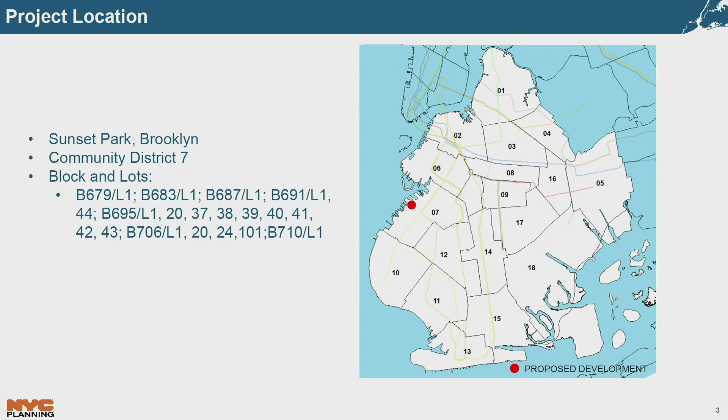These actions would facilitate the renovation and reactivation of a complex of 16 historic buildings and the construction of 3 new buildings that would contain a total of up to 6.6 million square feet of industrial, commercial, and community facility uses. The project is located in the Sunset Park neighborhood of Brooklyn in Community District 7.

Bush Terminal operated as a multimodal facility comprised primarily of warehouse and distribution uses in a complex of buildings and piers beginning in the 1890s. Goods that arrived by barge were received by rail and then distributed to the rest of the city. In 1928, Bush Terminal employed 35,000 people and had its own court system, police force, and fire department.

In the mid-1950s, Bush Terminal employed 25,000 workers and over 100 companies. However, employment began to decline following World War II as heavy manufacturing and large-scale warehouse distribution declined in New York City overall. In 2012, Bush Terminal employed fewer than 2,500 people.

Industry City is the privately owned portion of the former Bush Terminal complex that is the subject of the proposed actions today. Much of the remainder of the Bush Terminal complex was acquired by the City of New York in the 1970s and is comprised of a number of buildings and piers that are partially or fully vacant.

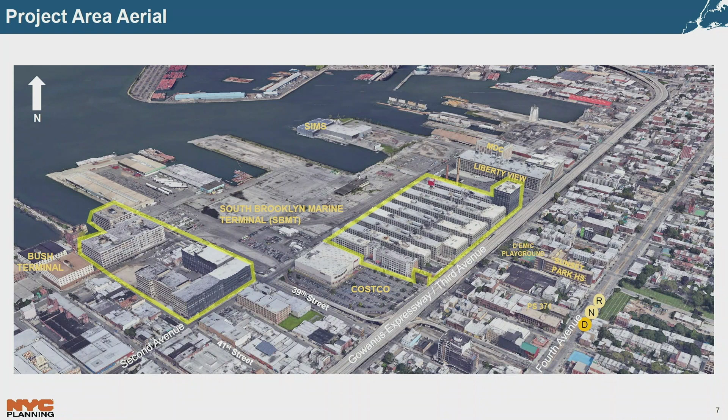M3-1 districts have a maximum FAR of 2.0. Height and setback regulations permit a maximum base height before a setback of 60 feet or 4 stories, and overall height is governed by a sky exposure plane. Parking requirements vary depending on the use.

South of the project area, between 2nd and 3rd Avenues, is an M1-2 district, and there is a very small portion of the project area along 3rd Avenue between 36th and 37th Street which is located in this M1-2 district. M1 districts permit a range of commercial, industrial, and select community facility uses.

A maximum FAR of 2.0 applies to the manufacturing and commercial uses, and a maximum FAR of 4.8 applies to those select community facility uses. Height and setback regulations permit a maximum base height before setback of 60 feet or 4 stories, with height governed by a sky exposure plane, and parking requirements vary depending on the use.

East of the project area, between 3rd and 4th Avenues, north of 38th Street, is an M1-2D district. In addition to the regulations governing M1 districts, M1-2D districts permit limited new residential uses upon authorization by the City Planning Commission.

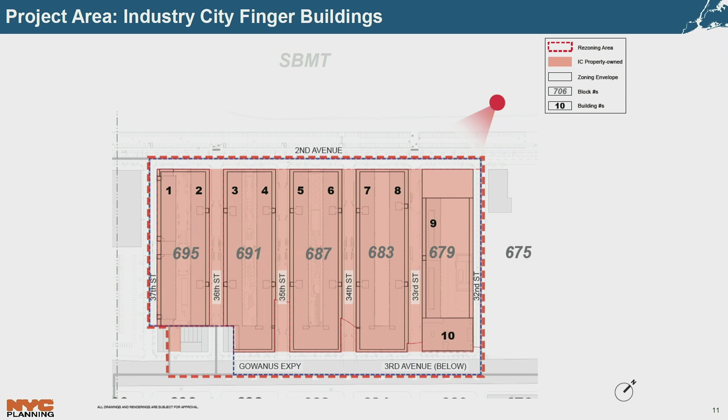There are 97 off-street surface parking spaces located along the Finger Buildings, parallel to 37th Street, and along the privately owned prolongations of 32nd, 33rd, 34th, and 35th Streets. In addition to these off-street parking spaces, a portion of the South Brooklyn Marine Terminal has been leased for additional parking, which can be seen along 2nd Avenue.

Buildings 1 through 8 contain central courtyards that open to 2nd Avenue. There are 3 publicly accessible courtyards in the U-shapes of Finger Buildings 1 and 2, 3 and 4, and 5 and 6. Each contains seating, passive recreational uses, landscaping, and seasonal programming.

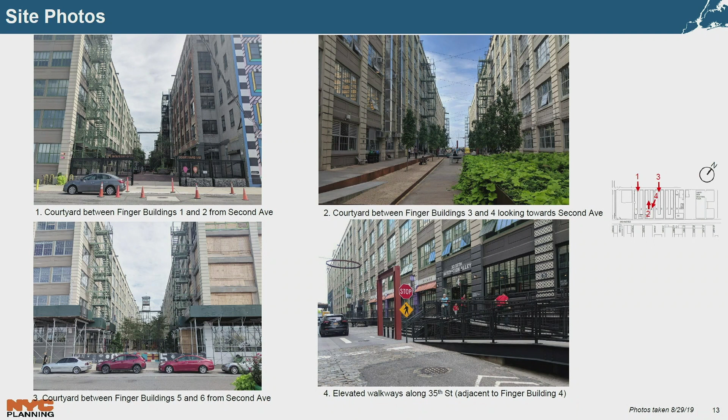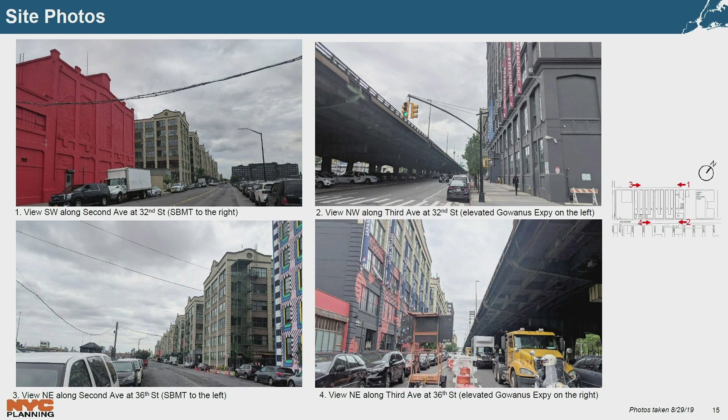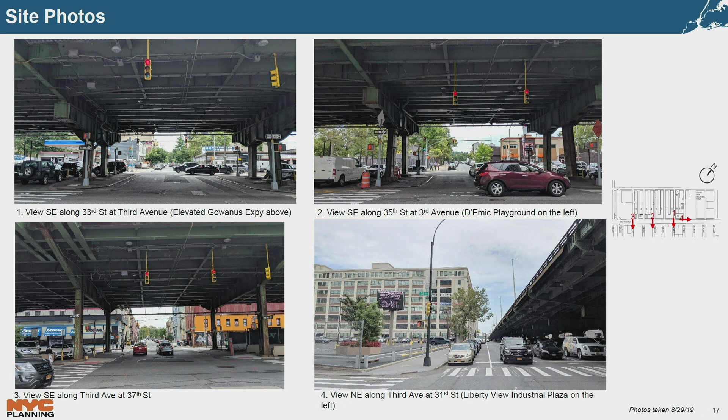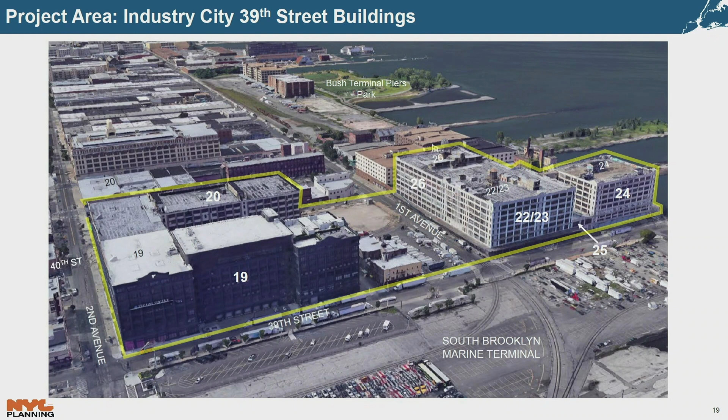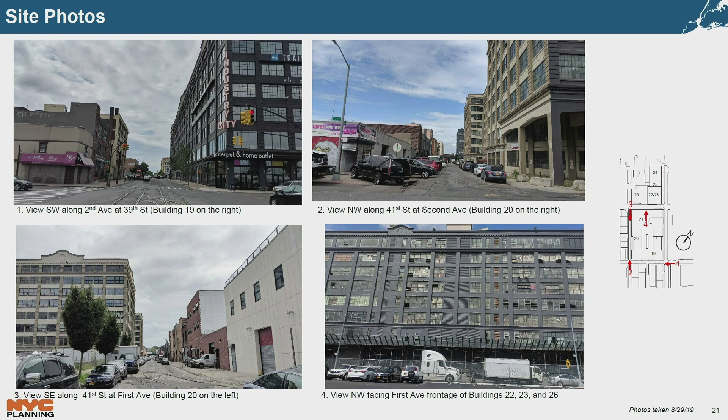Here, in the upper left, you see the view facing south along 2nd Avenue from 39th Street. The building on the right with the Industry City label is building 19. In the upper right is the view facing west along 41st Street at 2nd Avenue. In the lower left is the view facing east along 41st Street at 1st Avenue. And in the lower right is a direct frontal view of buildings 22, 23, and 26.

In 2013, the owners of Industry City launched an initiative to rehabilitate the buildings and activate the complex, which is the largest privately owned industrial complex in the city. Since 2013, over $300 million has been spent on basic infrastructure to increase the utilization of the existing buildings. In addition to the work on the loading docks, this includes replacement of over 7,000 windows, electrical upgrades, roof improvements, new boilers and radiators, and other energy-related infrastructure.

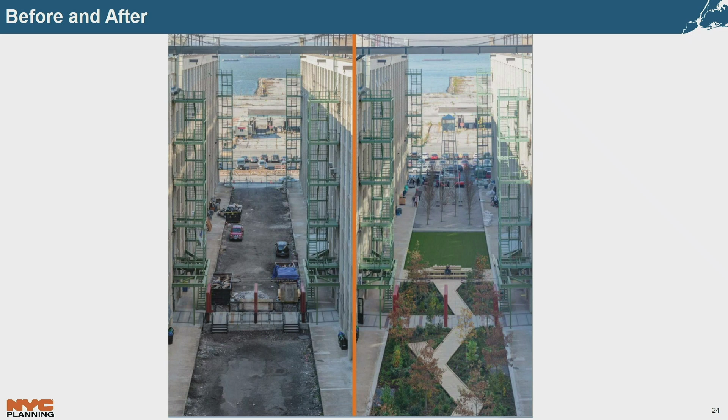3 of the 4 courtyards in the finger buildings were also developed as open green spaces to provide an amenity for workers and visitors that also improves connectivity across the site, improves site porosity and air quality, and allows for programming. Since 2013, the number of jobs has increased from 1,900 people at 150 businesses to over 7,000 people at more than 450 companies.

Part of this initiative involved the creation of the Innovation Lab, a public-private partnership between Industry City and a number of local community-based organizations that provide a range of workforce development and vocational programs to residents. Services include job placement, technology and vocational training, internships, ESL classes, and small business support services. Since opening in 2016, the Innovation Lab has placed more than 300 people in jobs at Industry City, 30% of which were residents of Sunset Park. Local youth are also connected to internships at businesses in Industry City through the Innovation Lab.

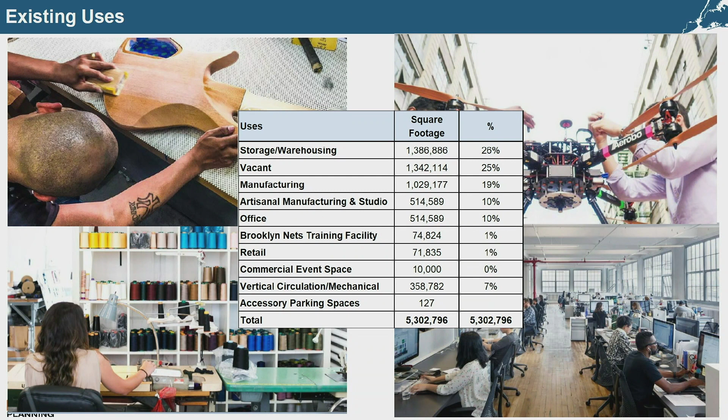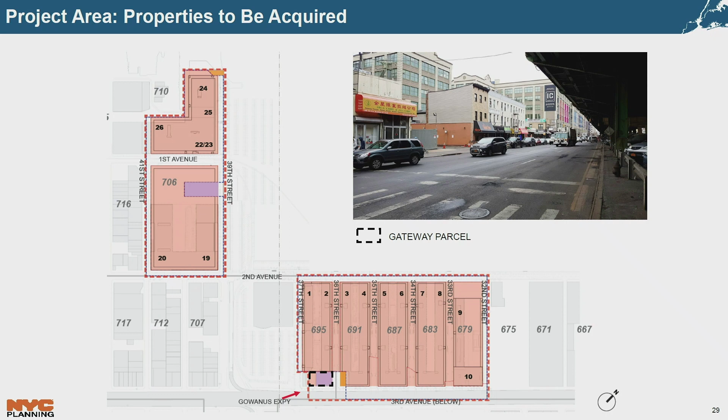Finally, shaded in orange, there are 3 tax lots that are affected by the proposed actions but are not part of the proposed development. This includes part of Block 662, Lot 1, located at the western terminus of 39th Street at the top of the diagram, and lots 45 and 46 on Block 691, which front on 3rd Avenue between 35th and 36th Streets.

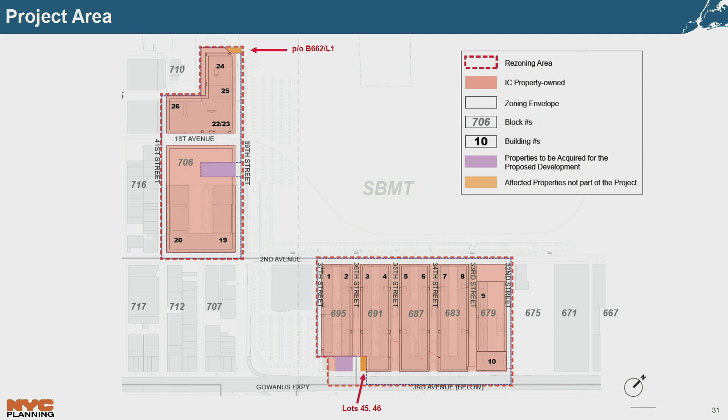The applicant seeks to create a center of industrial, commercial, and institutional employment while rehabilitating a complex of historic buildings on the Sunset Park waterfront and expanding the existing Industry City complex.

The applicant seeks to create an innovation district, described as an ecosystem comprised of a range of businesses involved in every step of the making process, from research and development to design and engineering, as well as manufacturing of goods. Innovation economy businesses make products in sectors including but not limited to art and design, film and television, retail, fashion, technology, and food.

The full vision for the proposed development involves the rehabilitation of 16 existing buildings and new construction of 3 buildings on 19 tax lots, with a total lot area of 1.3 million square feet. This would include up to 6.6 million square feet of development and an overall FAR of 4.97. The proposed development is projected to support over 15,000 jobs.

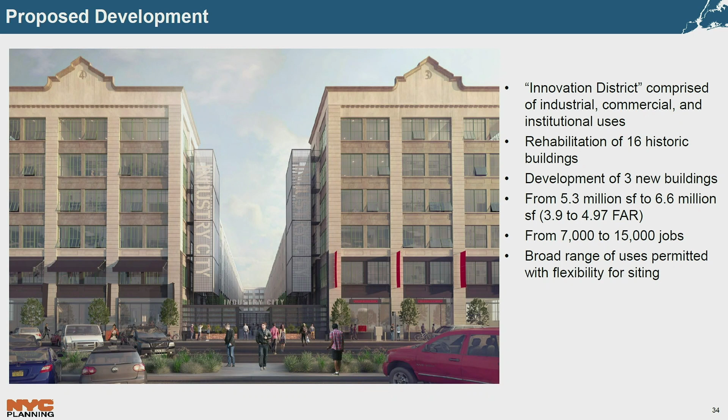The applicant seeks flexibility, both in a broader range of uses and in bulk regulations, to allow siting of different businesses and uses across the development as needs change over time. In addition, the proposed development seeks to provide a pedestrian-friendly environment that activates local streets and helps connect the upland neighborhood to the waterfront.

Many of the uses in the proposed development are present at Industry City today. These include office, some retail uses, art and production studios, and manufacturing uses, which are the core innovation economy uses. The applicant seeks to broaden the range of uses at Industry City to include uses that complement and support the primary job-generating innovation economy uses.

These include colleges and universities, which would support new classroom, lab, and research facilities, and would provide a venue for innovators to interface on research, design, training, and education. They will also allow businesses access to a pipeline of potential employees and facilitate access to higher education for workers on site.

In addition to colleges and universities, libraries, museums, and non-commercial art galleries would support research and education initiatives of existing trade schools and the proposed new academic institutions.

Hotels will serve new and existing businesses as they grow, providing prospective workers, partners, and visitors with direct access to the companies they are visiting. These hotels would fill a gap in the market for business-oriented hotels with meeting and conference facilities.

A wider range of retail and services than what is currently permitted is being sought. A broader range of retail and services will support the existing businesses at Industry City, in addition to providing amenities for workers, students, visitors, and residents.

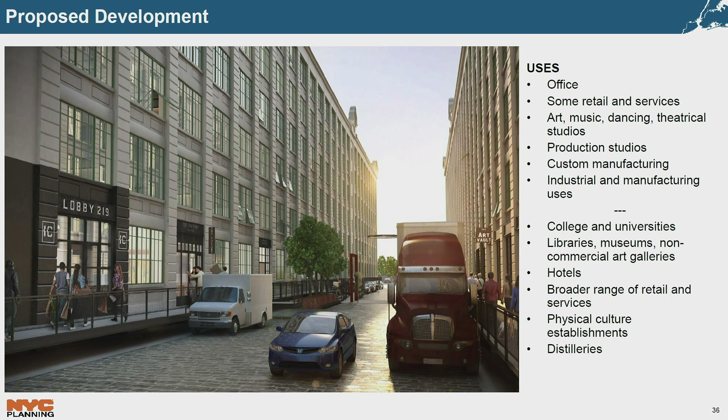Again, the proposed development seeks flexibility in the range of uses that would be permitted, as well as the locations of uses over time. Retail and hotel uses would be restricted to specific locations within the project area, but all other uses would be permitted to locate throughout.

Retail uses are intended to be a secondary use within the project and would be limited to a total of 900,000 square feet, representing 0.7 FAR. They would generally be restricted to the first and second floors to help activate the streetscape and create a pedestrian-friendly environment.

Local retail is anticipated to be oriented along 3rd Avenue, closer to the existing Sunset Park residential community, and a 40,000 square foot per establishment cap would apply to retail along most of the 3rd Avenue frontage in order to guide retail development towards neighborhood-serving local retail.

Destination retail is anticipated to locate in areas that could potentially accommodate larger footprints and are further away from the adjacent residential community. For example, along the 2nd Avenue frontage of the Finger buildings, and along 39th Street between 1st and 2nd Avenue. In these locations, retail would be permitted to locate on the 1st and 2nd floors without a per-establishment restriction.

The proposed community facility uses, specifically colleges and universities, libraries, museums, and non-commercial art galleries, would not be restricted to specific locations within the project area, but they would be capped at a total square footage of 625,000 square feet, approximately 0.5 FAR.

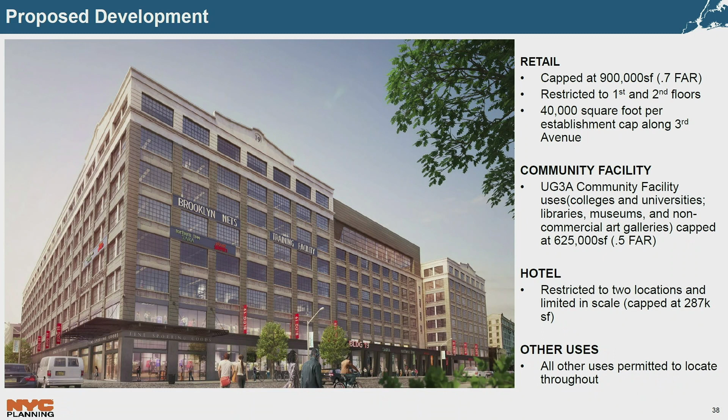The portion of the building fronting on 2nd Avenue would contain 13 stories and rise to 170 feet in height. The portion fronting on 32nd Street would contain 5 stories.

Both the Gateway building and Building 11 would form anchor points at the northwest and southeast corners of the Finger buildings, mimicking the bulk of the existing Building 10, which rises to 170 feet sheer without a setback.

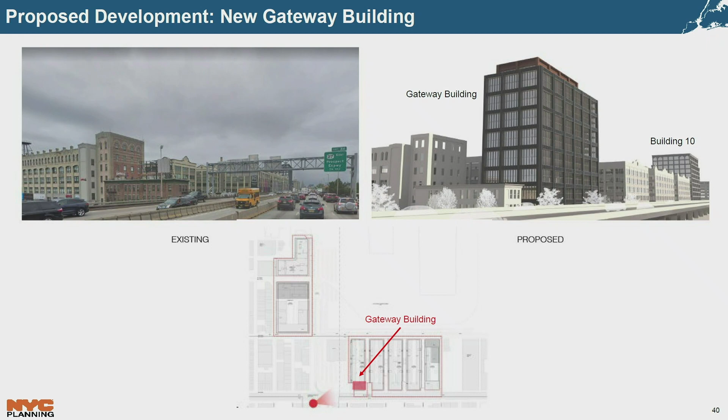New Building 21 would be located between Buildings 19 and 20 and 1st Avenue. It would contain 10 stories and rise to 150 feet in height, including approximately 781,000 square feet of floor area. One hotel would be located in this building, with up to a maximum of 127,000 square feet and 197 rooms.

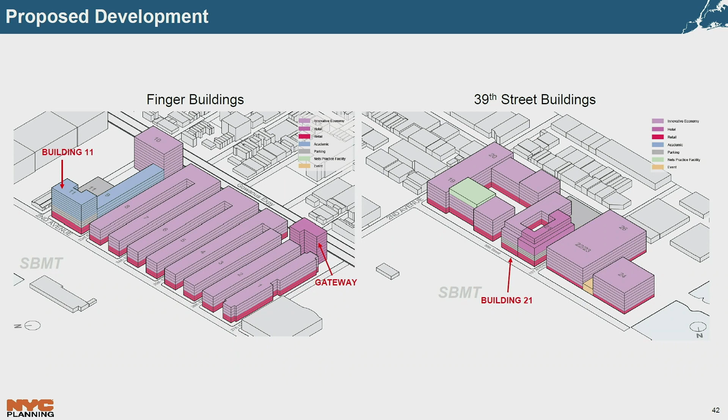Again, it's in Building 11, anticipated to include between 334 and 384 parking spaces, located on the 3rd, 4th, and 5th floors. Vehicular access to the parking facility would be provided from 32nd Street, closer to 3rd Avenue.

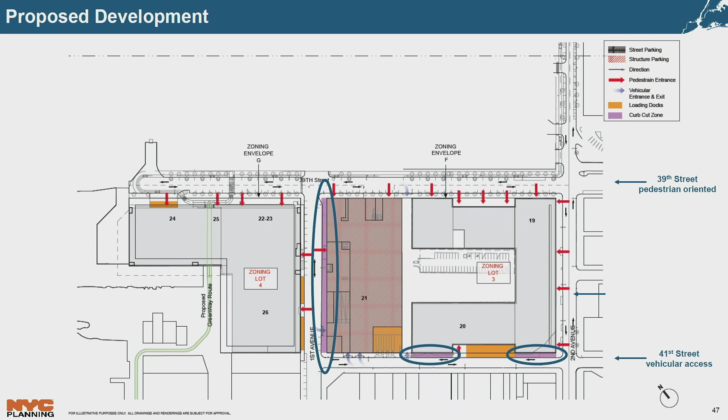In terms of the proposed actions, the applicant is seeking a zoning text amendment to establish a new special district in the zoning resolution. The new special district would create a new special permit that would modify use, bulk, and other requirements within the special district. A zoning map amendment would map the new special district and would change an M3-1 district to an M2-4 district, along with a special permit to modify use, bulk, and other requirements within the newly created special district, and a city map change to demap a street.

So in terms of the first action, the text amendment creating the new special district, the new special district would establish new use regulations and create a new CPC special permit that would modify use and bulk regulations. First I'll speak to the use regulations that would be applicable within the special district.

M1 performance standards would apply. Currently, the majority of the project area is proposed to be rezoned to an M2 district, which would impose M2 performance standards. However, the special district would impose M1 performance standards throughout the area, which are more stringent. Also, unenclosed sidewalk cafes would be permitted throughout the special district.

The text amendment would also create a new special permit that would allow the CPC to modify use and bulk regulations, subject to findings and a site plan.

There are a number of uses that could be permitted through this special permit which are not otherwise permitted in the underlying zoning districts. These include schools with no living or sleeping accommodations, colleges and universities, libraries, museums, and non-commercial art galleries. For the latter two categories—colleges and universities, and libraries, museums, and non-commercial art galleries—those uses together would be capped at a maximum of 625,000 square feet, or approximately 0.5 FAR. Hotels could be permitted, as well as physical culture establishments, which would otherwise require a BSA special permit, and distilleries.

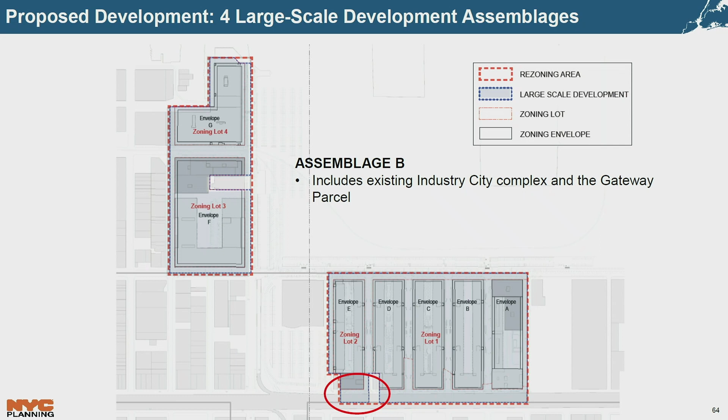Because the applicant does not have a clear timeline for the acquisition of those properties, 2 additional proposed development scenarios account for only one of the 2 parcels being acquired. So large-scale development assemblage B includes the extent of assemblage A plus the gateway parcel, and large-scale development assemblage C includes the extent of A plus the building 21 parcel.

So in terms of how this would work, if the proposed actions are approved, large-scale development assemblage A would be in effect. If and when additional properties are acquired in the future, the applicant would have to prove ownership of those parcels and seek a chairperson certification regarding that ownership. At the time that the chair certification is issued, large-scale development assemblage B, C, or D, depending on whatever parcels have been acquired, would then replace large-scale development assemblage A.

So in order to obtain a building permit on any property that the applicant did not own at the time that they applied for the special permit, they would have to provide the Department of Buildings with the chairperson certification that confirms the ownership of those parcels.

The special permit that the applicant is seeking would modify underlying use and bulk regulations of the following sections of the zoning resolution. First, I'll describe the use modifications that are being requested.

The applicant is seeking to allow the following uses to be permitted: colleges and universities, libraries, museums, and non-commercial art galleries, hotels, retail and service uses, all retail and service uses in use groups 6A, 6C, 9A, 10A, and 12B, physical cultural establishments, and distilleries.

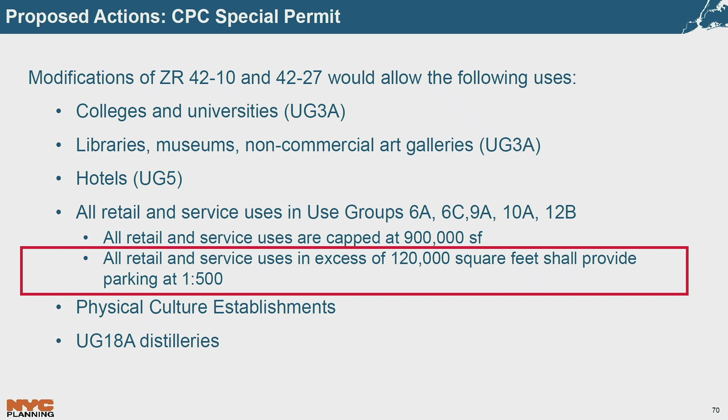There are a set of general findings that apply to all use modifications, and there are also a specific set of findings that applies specifically to the community facility uses and hotel uses. These findings were drawn from and based on existing findings that are standard in other types of special permits that allow for similar use modifications. The applicant's responses to these findings can be found in your briefing package.

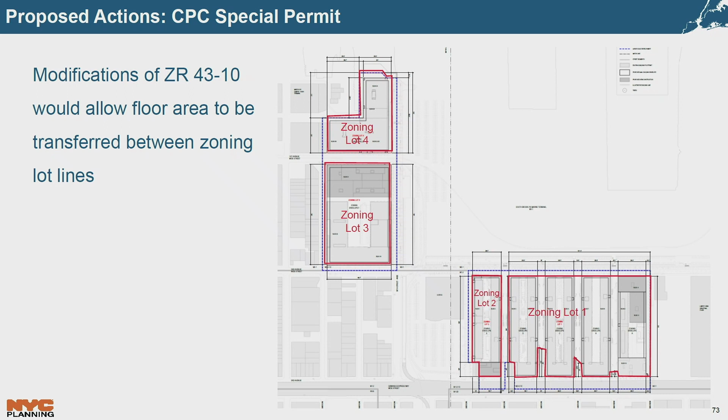Now I'll speak to the bulk modifications being sought by the special permit. While the overall floor area ratio of the proposed development would be limited by the underlying zoning districts, bulk modifications would permit floor area to be transferred across zoning lot lines. In this case, there are 4 zoning lots within the proposed development.

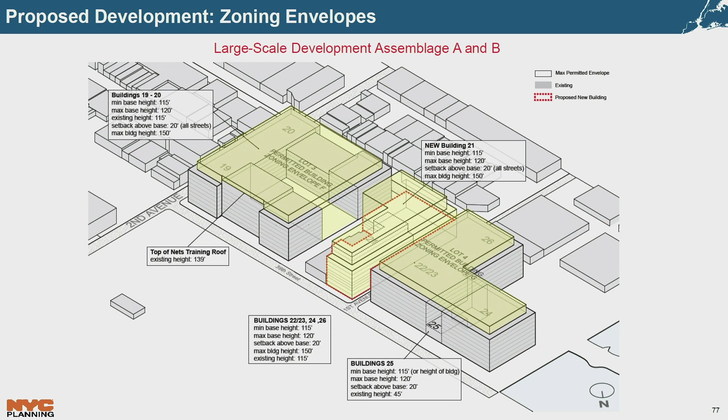The areas shown in yellow are where new floor area would be permitted that does not exist today, and you can see new building 21, outlined in red. This is the same diagram for assemblages A and B, which don't account for the acquisition of lot 20.

The zoning envelopes just shown would require relief from yard regulations as well as height and setback regulations in certain areas. This relief is being sought either to bring existing buildings into compliance as they encroach into the required yards, setbacks, or sky exposure planes, and would allow for vertical expansions of existing buildings, or new buildings that mimic the built form of the existing buildings as described earlier.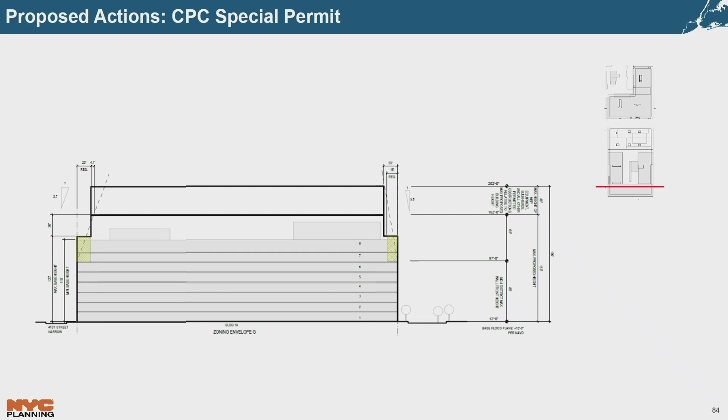There are a number of findings for bulk modifications that relate to the streetscape, existing buildings, character, access to light and air, and distribution of bulk. These findings were drawn from and based off of existing findings that are standard in other types of special permits that allow for bulk modifications, and the applicant's responses can be found in your briefing package.

An EIS was conducted, and a notice of completion for the draft environmental impact statement was issued on October 25th. Significant adverse impacts were identified with respect to historic and cultural resources, transportation, air quality, noise, and construction. Mitigation measures are identified in the draft environmental impact statement and will be explored further in the final environmental impact statement.

In summary, the applicant is seeking a zoning text amendment, a zoning map amendment, a special permit, and a city map change to facilitate a mixed-use development comprised of up to 6.6 million square feet of industrial, commercial, and community facility uses in Sunset Park, Brooklyn, Community District 7.

I'm happy to take any questions. That was quite a tour de force, Connie. Thank you. Commissioner Capelli, could you repeat that? How much, by the way, that was very impressive.

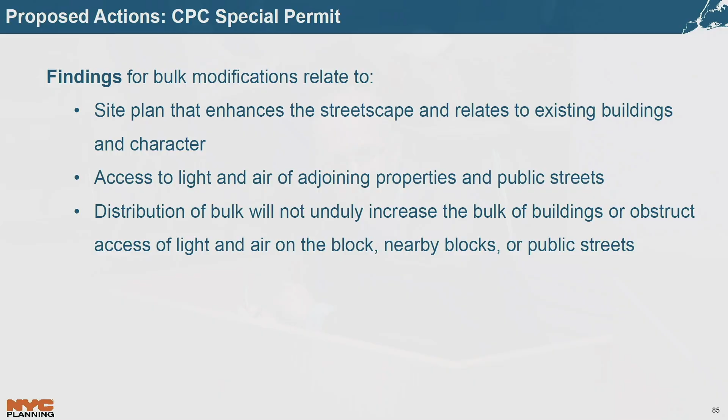The applicant has, as part of their application for each of the 4 special permit development scenarios, responded to a set of findings, making arguments as to why they meet each one, and all the details are available for review. I would note that, per Commissioner Levin's question earlier, absent a special permit there would be none of these findings. That's one of the reasons the borough office and others did it this way, but I think we'll have a more detailed answer further on.

I didn't understand that, but anyway - my question simply is, if you're adding bulk, particularly in the case of 33rd to 36th Street, which are very narrow, how can you find that you're not restricting access of light and air, you're not obstructing access of light on the block? You must be doing all of those things, right?

The findings for all 4 scenarios are included in your briefing packages, so you can actually read through the detailed responses to each one of those findings and how they addressed each of those sections. Okay, so back to my homework.

The other question was, somebody mentioned the 25% vacancy. So it seems like we're adding 1 million square feet and we already have 25% vacant. The building's in disrepair. So the buildings are in various different shapes, which is why they're vacant - they just haven't been repaired.

Some of them, like towards the waterfront, buildings 24 and 25, are particularly in poor shape - I understand them to be uninhabitable at this point - where other buildings have had more capital investment and are more utilized. So I think that explains the vacancy - yeah, because I'd heard there was a waiting list, and I thought, how can there be 25% vacancy with a waiting list? But that explains it. Thank you.

Commissioner Burney, would diagrams specific to the areas with narrower streets - we could put those in when we come back. I think they exist, we can just pinpoint that. Just to clarify, in case I didn't cover it, I'll go back to a diagram related to your point about narrow streets in the finger buildings specifically.

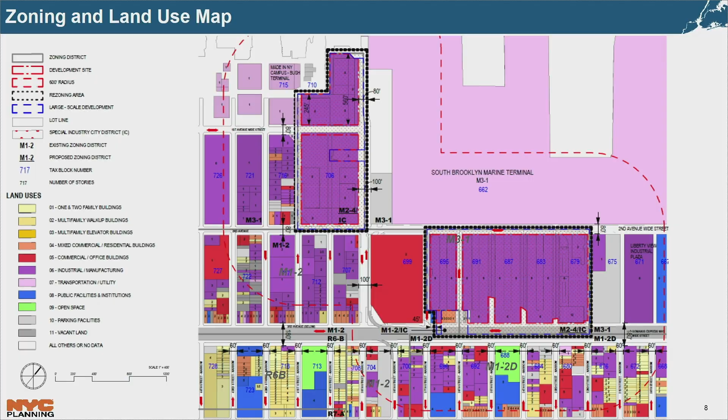Other questions? Okay, then Connie, after an hour and 20 minutes, you're off the hook. The application is certified. Thank you.

The second item on the agenda, page 151, is a certification of a zoning map amendment in Brooklyn Community District 2. Our presenter is Sarit Platkin.

Good afternoon. This is a private application by All West Old Fulton LLC for a zoning map amendment to rezone the project area from M2-1 to M1-5 to facilitate the development of a 5-story commercial building with retail on the cellar, first and second floors, and offices on the 3rd through 5th floors in Fulton Ferry, Brooklyn Community District 2.

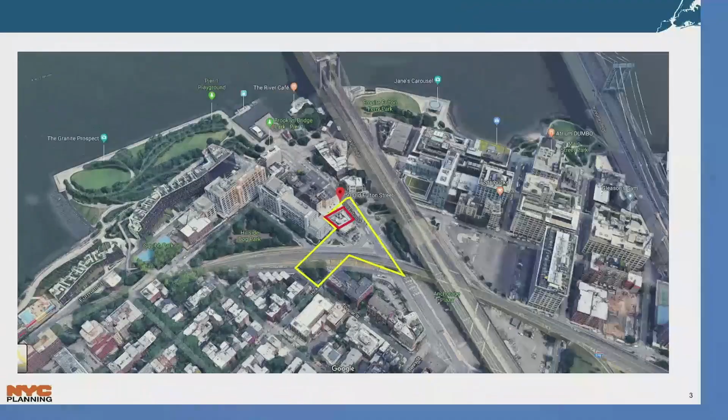The project area is located in the Fulton Ferry neighborhood, a triangular area bordered by the Brooklyn Bridge and Dumbo to the north, the Brooklyn-Queens Expressway and Brooklyn Heights to the south, and the East River and Brooklyn Bridge Park to the west. The surrounding area consists of a mix of residential, commercial, and industrial uses, as well as a large amount of public open space located under the Brooklyn Bridge and the Brooklyn-Queens Expressway.

Dumbo, a mixed-use residential and commercial area just north of the project area, has emerged as a premier job center for technology startups in recent years. Large 8 to 15-story commercial and mixed-use converted loft buildings are typical in Dumbo and south of the project area in Fulton Ferry.

On the south side of Old Fulton Street, adjacent to the project area, there is a landmark building, the Eagle Warehouse and Storage Company, a 9-story former manufacturing loft building that was converted to residential use in 1980.

A recent nearby commercial conversion includes Panorama, formerly the Watchtower buildings, on the 2 blocks just south of the project area across Doughty Street. These buildings once served as a headquarters for the Jehovah's Witnesses and are now being converted to 635,000 square feet of office space, 35,000 square feet of retail space, and 15,000 square feet of hospitality uses.

The project area is within an M2-1 district that extends from the Brooklyn Bridge south to Red Hook, Brooklyn. Historically, light manufacturing zones extended to the north into Dumbo as well. 2 land use actions rezoned significant portions of Dumbo from manufacturing to mixed-use districts in the late 1990s and early 2000s.

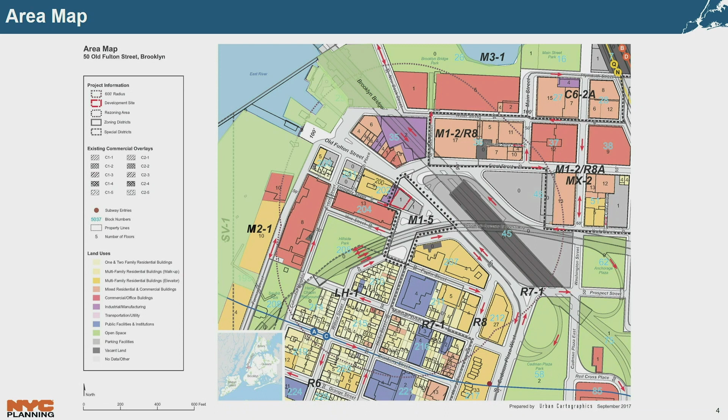The typical built form in the immediately surrounding area consists of 4-story residential buildings with ground floor retail on the north side of Old Fulton Street, and 4 to 9-story residential buildings, 1-story auto body shops including the project site, which you can see on the left in the top left photo with the purple awning, and parking lots on the south side of Old Fulton Street.

As mentioned previously, larger 8 to 15-story commercial loft buildings are typical of the south side of Old Fulton Street, just west of the project area. Also zoned M2-1, the north side of Old Fulton Street has active ground floor uses and public spaces, including a public plaza, Old Fulton Plaza, which you can see in the top right photo.

As a key pedestrian corridor connecting the main entrance of the 85-acre Brooklyn Bridge Park and Fulton Ferry Landing to transit, Old Fulton Street has become an increasingly active retail and tourism destination, with restaurants and cafes lining the north side of the street, as well as Fulton Ferry Landing, 1 block west of the project area.

The project area is generally bounded by Old Fulton Street to the north, Hicks Street to the east, and Doughty Street to the south. 50 Old Fulton Street, the development site, includes an irregularly shaped 6,600 square foot through lot, improved with a 1-story, approximately 6,600 square foot auto body shop, which has been used as an auto body shop since the late 1960s.

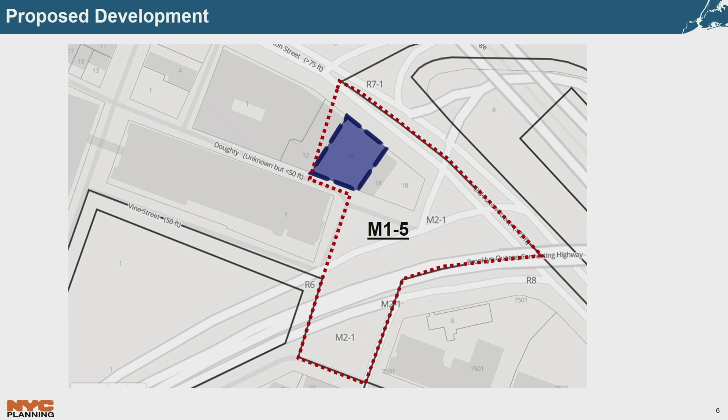46 Old Fulton Street, a lot partially included in the project area, is a 4,600 square foot lot improved with a 4-story, approximately 16,000 square foot warehouse, and it is also the forthcoming location of the eating and drinking establishment, L&B Spumoni Gardens. The project area also includes a small triangular area south of the BQE at the intersection of Poplar and Hicks Street. This triangular area includes the Poplar Street Community Garden, a 1,900 square foot green thumb garden, which is part of the mapped street and would therefore be unaffected by the zoning change.

All West Old Fulton is proposing a 5-story, 85-foot tall building that would include approximately 33,000 square feet of retail space on the cellar, ground, and second floors, and office space on the 3rd through 5th floors. The applicant is targeting creative users such as technology, startup, advertising, and design firms, as well as office tenants.

The proposed commercial and retail uses would be consistent with the active uses seen on the north side of Old Fulton Street and nearby in Dumbo and Fulton Ferry. The new building's floor plates would be 6,600 square feet on each floor, resulting in 100% lot coverage. There would be no required accessory off-street parking or loading, and none would be provided on the development site.

The actions necessary to facilitate the project include a zoning map amendment to rezone the project area from an M2-1 to an M1-5 zoning district. M15 would be mapped between the south side of Old Fulton Street, the north side of Doughty Street, and the west side of Hicks Street to facilitate commercial and retail development.

M15 is a moderate density light manufacturing district that allows 5.0 FAR of industrial and commercial uses and 6.5 FAR of community facility uses. The maximum base height in M15 districts is 85 feet or 6 stories, whichever is less, and the maximum building height is subject to a sky exposure plane.

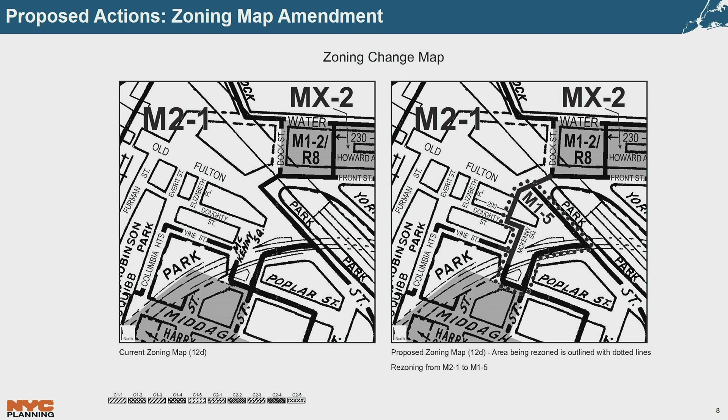Questions from the commission?

Okay, the application is certified. Quite a difference from the prior one.

The third item on the agenda, page 169, is a certification of a UDAP designation and disposition of city-owned property in Brooklyn Community District 8. Our presenter is Amy Jen.

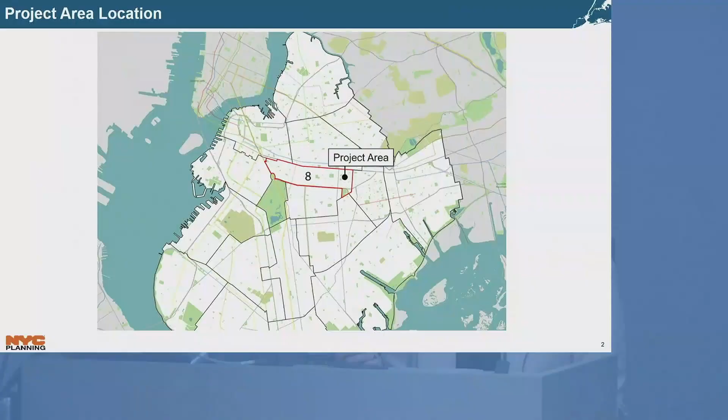Good afternoon. This is an application by the Department of Housing Preservation and Development, HPD, to request the designation and approval of an urban development action area and disposition of city-owned land. This application would facilitate the development of a new 8-story building with 44 affordable units at 1559 to 1563 Prospect Place. The development site is located in Weeksville, Brooklyn, Community District 8.

The surrounding area is largely comprised of residential and institutional uses. A few local commercial establishments can be found along the avenues. The surrounding area, including the project area, are zoned R6. R6 is a non-contextual medium-density residential district that allows residential and community facility uses.

Under the height factor option, residential developments have a maximum base height of 60 feet or 6 stories and no fixed height limit, with height controlled by a sky exposure plane. Under the quality housing option, residential developments have a maximum FAR of 2.2 with a maximum base height of 60 feet and building height of 70 feet.

Developments containing affordable independent residences for seniors, AIRS, have a maximum FAR of 3.9. Maximum base height for AIRS buildings is 65 feet and maximum building height is 80 feet, which increases to 85 feet with a qualifying ground floor.

The surrounding area is well served by public transportation and located within the transit zone. The Utica Avenue subway station for the 2, 3, and 4 has entrances a little over half a mile away on Eastern Parkway. The Ralph Avenue subway station for the A and C has entrances a half mile away on Fulton Street. The area is served by the B15, B45, B65, and B47 buses.

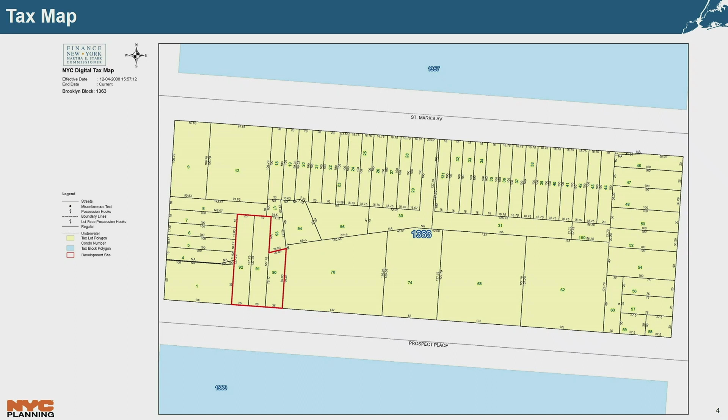The proposed development consists of the new construction of an 8-story building with a total of 44 units of affordable rental housing plus 1 superintendent's unit. Of the 44 dwelling units, 26 will be affordable independent residences for seniors units, and there will be units set aside for formerly homeless households. The proposed development is expected to contain a mix of studio, 1- and 2-bedroom rental units, 3,452 square feet of outdoor recreational and garden space, and a community room on the ground floor.

Yes, Amy, the slide that shows the adjacent building to the left, the one that is at 183 Buffalo - those aren't lot line windows, are they? No, they are not. So there's a gap between that building and the proposed building. The gap belongs to the existing building? Yes, it does. Okay, so this proposed new building would be built up to its lot line, leaving that gap to protect it? Correct. Thank you.

Commissioner de la Uz: I'm just wondering on the design, if you could go back to the facade - are those really air conditioners that are expected to be through-wall? The air conditioners are provided by the developers. Okay, we can talk more when it comes back about that - especially the way they're protruding.

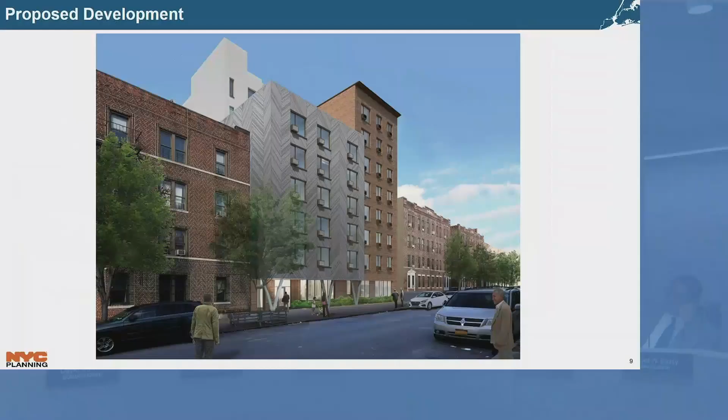Commissioner Burney: I'm just trying to understand that rendering. It's projecting beyond the street wall? It is not. It's a very strange drawing. It looks like, because of the gap between the building on the left and the proposed building, that sliver of the building that looks like it's protruding out is actually just the gap between the two buildings. So is there a gap between this building and the next building then as well? Because it looks as though it's in front of that one too, doesn't it? So the brown part of the proposed building, the 8-story part that you see, is part of the proposed project as well, and it sets back slightly from the gray area.

So why does it do that? So I see - when you get to the street wall further down the block, it's actually set back slightly from the street wall. Is there some reason why they're not being consistent with the street wall? I can have HPD respond to that. And is there some reason why, in an entire street of brick facades, we can't have a brick facade? I can get HPD to respond to that. Thank you.

Other questions? Okay, then the application is certified. Thank you.

Item 4 on our agenda, page 189, is a non-ULURP review of a zoning text amendment in Queens Community District 2. Commissioner Rampershad is recused on this item, and our presenter is Scott Solomon.

Good afternoon, Commissioners. 6411 QB Owner LLC requests a text amendment to map 2 mandatory inclusionary housing areas on 2 project areas located a half mile apart from each other in the Woodside and Maspeth neighborhoods in Queens Community District 2. The proposed text amendment is requested to facilitate the development of 2 new mixed-use developments on 2 corresponding development sites.

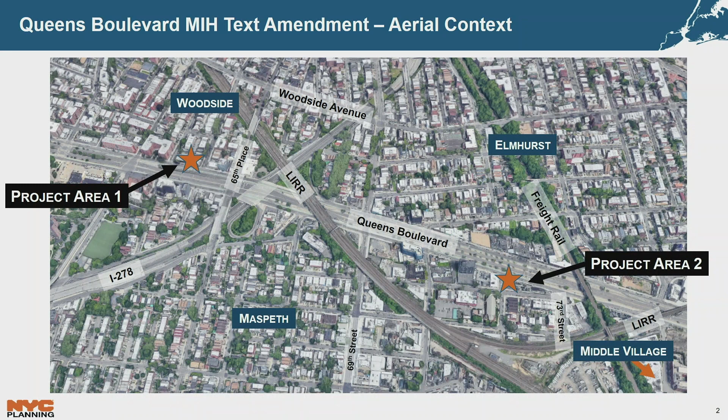The project areas were rezoned to R7X/C2-3 in 2006, also including the borough's first voluntary inclusionary housing areas being designated, mapped coterminously with the R7X/C2-3 district. Pre-MIH, pre-2016, there was no difference between the maximum floor area in R7X districts outside and within the IHDAs.

Since MIH was enacted, developments in R7X districts that do not provide affordable housing within the existing voluntary IH districts were only permitted a maximum base FAR of 3.75, and a maximum of 5.0 when affordable housing was provided. When MIH is mapped in an R7X district now, the corresponding FAR is 6.0, representing an approximate 60% increase in the floor area compared to the base of 3.75. In the surrounding areas, since IH was mapped, there have been 0 buildings currently constructed beyond the 3.75 FAR.

In 2018, the 6902 Queens Boulevard rezoning was approved. I just want to point out on the land use map, it's just west of Project Area 2. I'll note an oversight in that the map here doesn't show the existing rezoned area. So just south here, excuse me, just west of the project area, south of Queens Boulevard, between 69th Street and 70th Street.

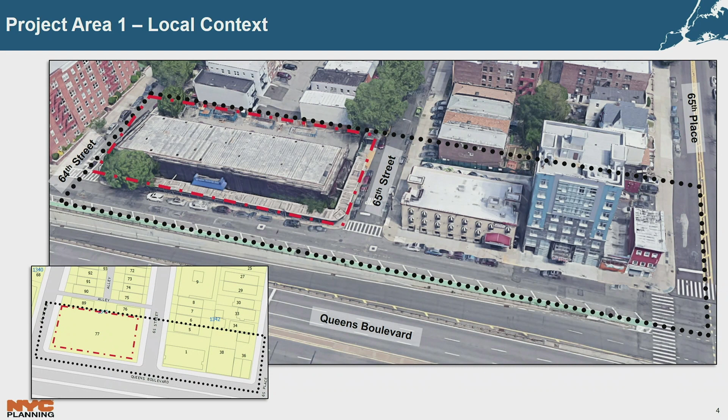Zooming into the Woodside neighborhood, Project Area 1 includes the block fronts on the northern side of Queens Boulevard between 64th Street and 65th Place, approximately 48,000 square feet. Development site 1 is vacant, was formerly a 2-story motel. It was demolished prior to this aerial photo being taken. Moving east is the 2-story motel, followed by a 9-story mixed-use building, and then a 3-story mixed-use building on the corner.

Zooming down into the street level, looking northwest to development site 1, you see the vacant property surrounded by a construction fence with a bicycle lane to the left. Pivoting to the right, looking at the balance of the project area, it's the 2-story motel followed by the 2 mixed-use buildings. Looking south from the R4 district to the north, looking towards Queens Boulevard with a higher density south of Queens Boulevard. Looking at that same assemblage of properties from the northeast looking southwest, again these properties here, mixed-use developments, all utilizing no more than 3.75 FAR.

Moving east to the Maspeth neighborhood, Project Area 2.

This includes the block fronts between 70th Street and 73rd Street on the southern side of Queens Boulevard, totaling approximately 91,000 square feet. Moving from east to west: first the development site, a one-story auto sales and livery leasing company, an auto supply shop, then across 72nd Street, a vacant, formerly Entenmann's factory with a service parking lot, a new 11-story mixed-use building built only to the 3.75 FAR, a former auto sales lot, another auto repair shop, and then from the northwest corner of 70th Street and Queens Boulevard, a two-story residence, two two-story mixed-use buildings, a detached three-family residential building, and a one-story warehouse.

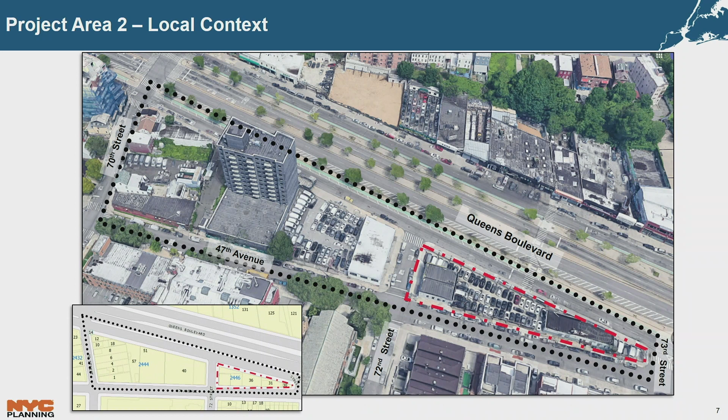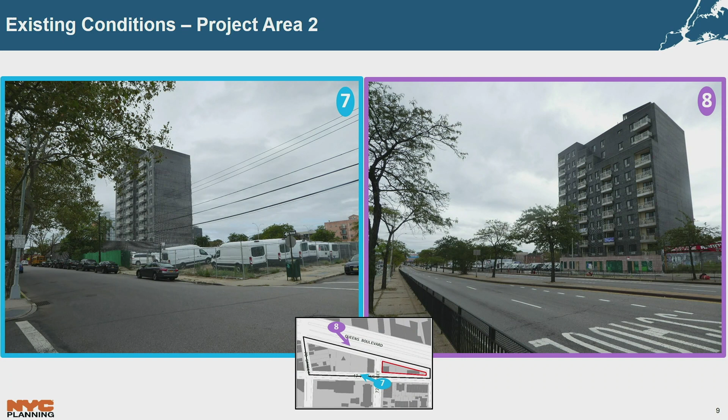Looking at development site 2 on the left, from 72nd Street looking east. Photo 7 shows the project area from 47th Avenue looking north, with the rear of the 11-story mixed-use building. And here's the same building viewed from Queens Boulevard, the front portion.

In terms of proposed development, development site 1 is a proposed 13-story mixed-use building consisting of 140 dwelling units, 1,600 square feet of ground floor retail space, and 75 permitted parking spaces accessory to residential and retail uses. 35 to 42 of the dwelling units would be required to be permanently affordable. The site is within the transit zone, reducing parking requirements; however, the applicant is providing more than the required parking spaces. The building would have a residential FAR of 5.92, a commercial FAR of 0.08, maxing out at the 6.0 FAR, and a building height topping at 135 feet.

Development site 2 is a proposed 12-story mixed-use building consisting of 78 dwelling units, 5,400 square feet of ground floor retail space, and 32 required parking spaces. The site is not within a transit zone. 20 to 23 of the dwelling units would be subject to MIH. Development site 2 would have a maximum height of 125 feet, residential FAR of 5.51, commercial FAR of 0.39, nearly maxing out at 5.9 FAR.

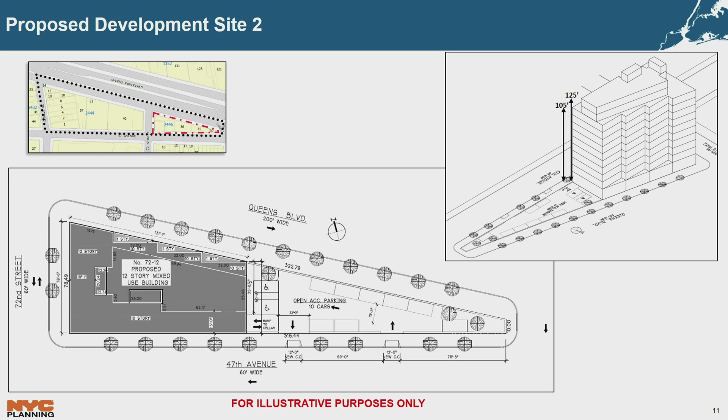Within the voluntary inclusionary housing areas, R7X districts permit a maximum of 3.75 FAR for developments that do not provide affordable housing, and a maximum of 5.0 FAR for developments that do provide affordable housing. However, when you do map MIH in the R7X district, the FAR increases to 6.0, facilitating more affordable units. The maximum community facility FAR remains at 4.0, and commercial FAR remains at 2. The text amendment would increase the maximum density; however, the maximum building height of 145 feet or 14 stories remains the same.

The applicant views the additional housing density as appropriate for this wide major thoroughfare, Queens Boulevard—8 lanes, 4 in both directions, 2 bicycle lanes with protected barriers—as appropriate for going beyond the voluntary inclusionary floor area, and that it would meet the growing housing demands of the area. Absent this action, any affordable housing would be an option, not a requirement. Thank you.

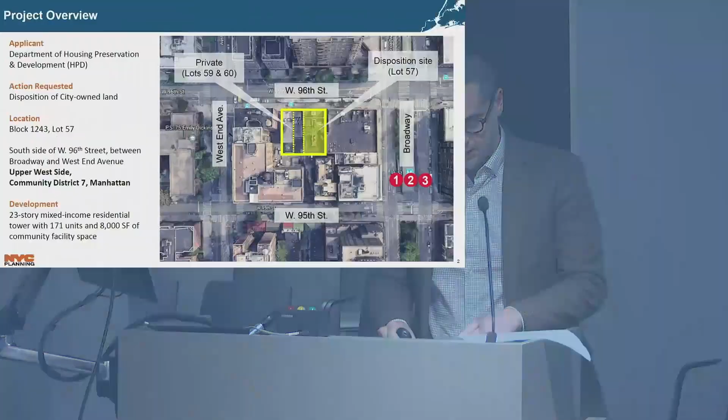Hello, good afternoon. This is an application by HPD for the disposition of city-owned real property located at 266 West 96th Street. The property is a 5,000 square foot lot on the south side of West 96th Street between Broadway and West End Avenue on the Upper West Side, Manhattan Community District 7.

The project sponsor and HPD are working to assemble the disposition site on the right, highlighted in yellow, with 2 privately owned properties to the west to construct a 23-story, 125,000 square foot building containing residential and community facility uses. Public financing is anticipated to be through HPD's mixed middle income program.

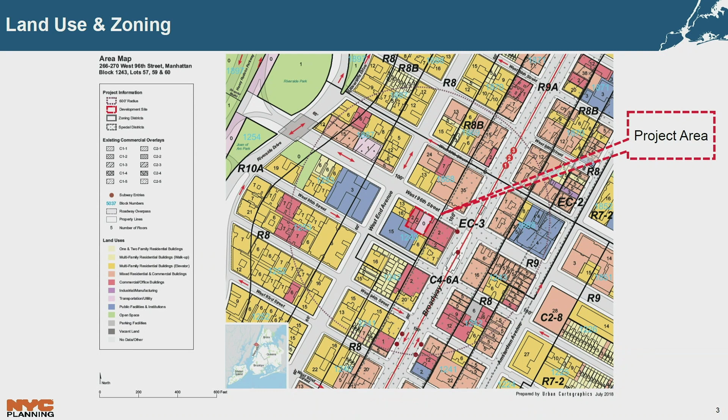The surrounding area is characterized by mixed-use developments along Broadway, a mix of low and mid-rise buildings, residential buildings along West End Avenue and the mid-blocks, with several institutional uses scattered throughout. The predominant zoning districts in the surrounding area are R10A and R8. A commercial corridor is located directly east of the project area along Broadway, which includes C4-6A, which is an R10A equivalent, and a C1-5 overlay. An enhanced commercial district is also located along Broadway, and the Riverside West End Historic District is directly adjacent to the project area to the south and west.

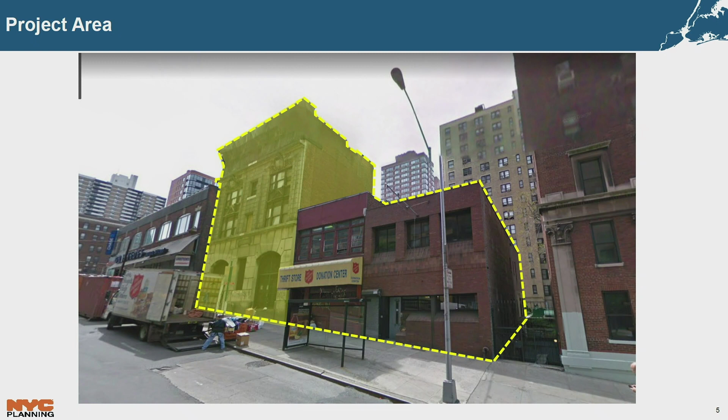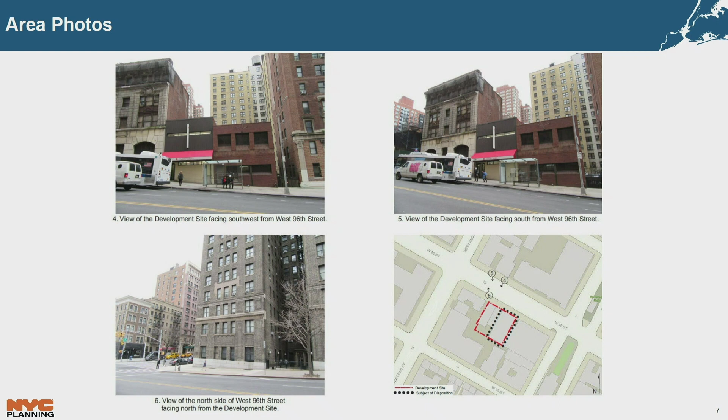The proposed development will consist of a 23-story mixed-use building containing approximately 171 mixed-income rental units with a mix of micro units, 1-bedroom, 2-bedroom, and 3-bedroom units. Approximately 40% of the units, or 68 units, will be permanently income restricted for households earning between 50 and 130% of area median income. The proposal includes approximately 8,000 square feet of ground floor community space, 6,500 of which is intended to be used by the Salvation Army. The project will include several amenities available to all residents, including a gym, 3,400 square feet of indoor amenity space, and an outdoor terrace.

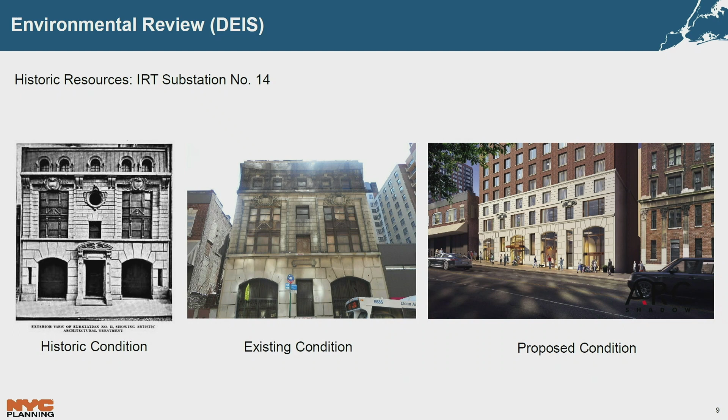The draft environmental impact statement identified significant adverse impacts with respect to historic and cultural resources, as the building on the disposition site is one of the 8 original substations that powered New York City's early subway system, built in 1904. To mitigate adverse environmental impacts, the project sponsor has pledged to incorporate significant features of the substation into the design of the new building, including the first floor facade and ornate cartouches above the 3rd floor bays that you can see above, and design the new building so that it reflects features and materials of the former substation.

So in summary, to facilitate the proposed development, HPD is requesting CPC approval for the disposition of city-owned property, and no modifications or waivers to the underlying R10A zoning district are being sought. I'm happy to take any questions.

Questions from the commission? Commissioner de la Uz: Do you have an overall unit breakdown by AMI, or is that something we can just get when it comes back? It'd be helpful to have that.

So HPD can speak to that when it comes back. I believe they're still finalizing the final program with the project sponsor. Okay, and to know exactly which of the units are intended to be permanently affordable as well in that grid. And then I'm just, if they could also speak to why the choice of the mixed middle income versus another HPD program that would have brought deeper affordability.

Commissioner Burney: Is the substation a landmark? It is not an individual landmark, no. And it was never calendared for landmark? I don't believe so, but I can get back to you on that. Okay, thanks.

Other questions? Commissioner Levin: Now, when this comes back, there's some really HPD-related questions that I'm going to be curious to get more clarity on. And particularly, I guess my main question here is whether we're getting enough affordable housing out of a significant public asset. I note that the disposition site is approximately half of the total development site, yet we're only getting 40% of the dwelling units as permanently affordable. Optimally, when we're using city-owned land, that ought to be used entirely for affordable housing. So I'm hoping we can get a little bit more affordable housing out of this project.

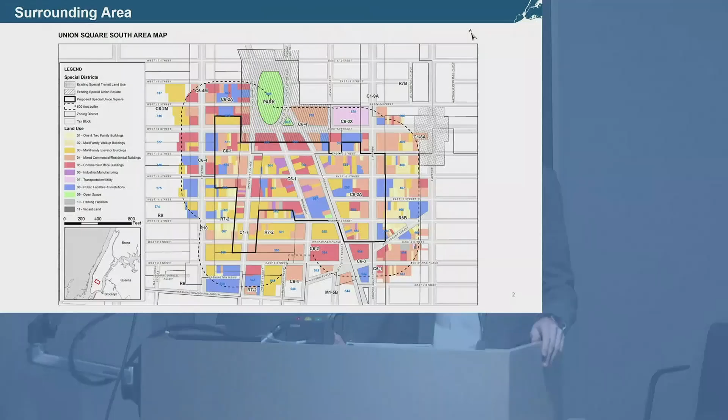The new area proposed to be Subdistrict B of the Special Union Square District is shown in the black outline on this slide. The existing special district, which would become Subdistrict A, is shown in the gray hatch. The project area is directly south of Union Square, shown in green. Generally, the area is bound by 5th Avenue to the west, 14th Street to the north, 3rd Avenue to the east, and East 9th Street to the south.

Directly west of the study area is the Greenwich Village neighborhood, defined by predominantly residential and institutional uses. To the north is Union Square, surrounded by mid to high-rise commercial and office buildings, as well as high-density mixed commercial and residential buildings. The East Village is to the east, where residential low-rise buildings predominate on the mid-blocks, and slightly taller mixed residential and commercial buildings line the major north-south corridors. To the south are mixed commercial and residential uses, as well as large commercial buildings built on large lots, including some that comprise the entire block.

In 1984, the department established the Special Union Square District to encourage mixed-use development on the many vacant and underutilized lots surrounding the park. The most recent zoning change was in 2010, when the department rezoned the 3rd and 4th Avenue corridors to the west of the East Village to a contextual commercial district. That C6-2A district makes up the eastern portion of the project area.

Outside of land use approvals, the department has been in discussion with community stakeholders and elected officials about the land uses and bulk within the project area for the past few years. They've expressed a desire to regulate commercial development amid concerns that the area is overdeveloping with buildings that are out of context with the surrounding area. Understanding these concerns, the department has studied the existing and future land use trends in the area.

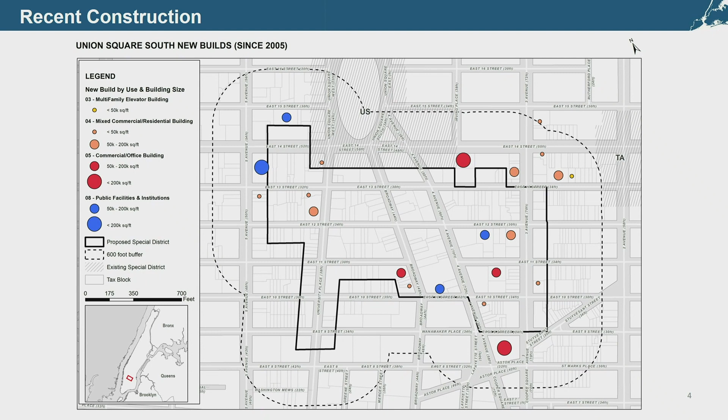The new special permit in Sub-District B would allow the city to mediate and maintain the mixed-use character of the neighborhood while continuing to connect the more commercial uses in Union Square with the more residential uses in the East Village and the mixed residential, commercial, and institutional uses in Greenwich Village.

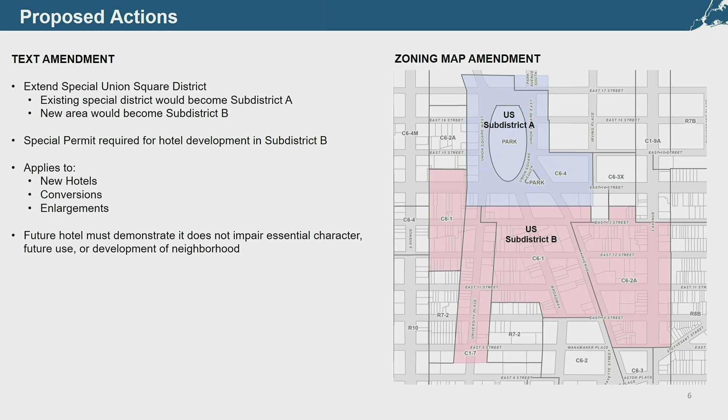In summary, the Department of City Planning proposes a zoning map and zoning text amendment to extend the special Union Square district, create Sub-District B, and require a hotel special permit within that sub-district. Happy to take any questions.

Vice Chair Knuckles: Well, I am curious because, as you point out, this is a very varied district in terms of architectural style - pre-war, post-war, new institutional construction. So what kind of proposal would impair the essential character? What is the essential character of this area, given the varied architectural product that's there now?

Sure. So currently, the character is that it's mixed use. And so the special permit would allow for these block by block variations that we see, from these tall, big buildings and bigger lots, to these smaller mid-rise and low-rise tenement-style walk-ups. So each block then would have a site-specific determination that a hotel would then have to meet those findings.

Each block? Yeah, the context varies so widely. If one looks at 3rd Avenue going up or 4th Avenue going up through there, very different from the mid-block characters. I know in discussions with community members, many have mentioned the Moxy Hotel, which is along 11th Street, replacing a solid row of 5-story walk-ups with a hotel mid-block. Those would be the kind of case-by-case determinations that the special permit would require us to make.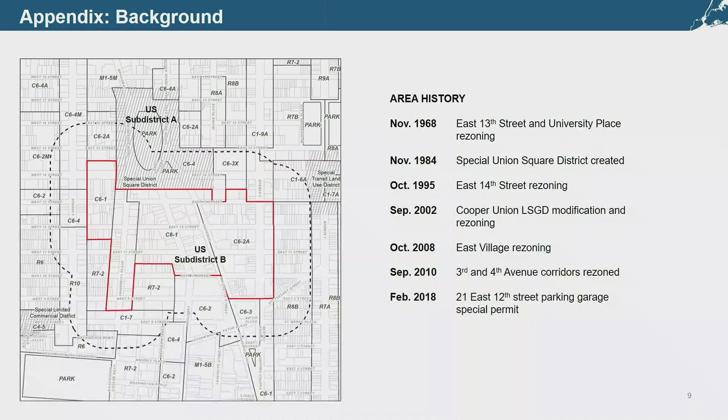Oops, I think I skipped that. No, I'm sorry, the findings that are proposed for this hotel, this one. Here we go, there we go.

I'd look at the final finding where the commission may prescribe appropriate conditions and safeguards to minimize adverse effects on the character of the surrounding area. So the crux of my question is: is that language strong enough for us to require a street wall lineup if we so chose?

Traditionally, essential character has included the built form in addition to use. That's helpful, thank you for making my question more succinct.

Other questions? Commissioner Burney? I'm sure there are good reasons for it, but the boundary seems very irregular, and one wonders why certain blocks are in and others are out.

It certainly does at first glance, but you'll notice that where it kind of sawtooths out, there's an R7-2 district here and here, where hotels aren't normally permitted anyway. So it becomes a more regular shape once you incorporate the residential districts.

Commissioner de la Uz: Do you mind going back to the finding language again? Obviously the language then would also, to the extent that some of the hotels we've seen or could see would be potentially replacing existing residential uses, including rent-stabilized uses, I'm just wondering if we want to have stronger consideration of that.

If we look back here, we see that a lot of these lots are already improved, except for this tiny interior lot, which is about 546 square feet. I think it's used as a backyard. That's the only vacant lot.

Within our environmental review, we only found 2 assemblages that would potentially develop, and we do not anticipate that those are rent regulated because they fall below the threshold.

I guess I'm really thinking both in terms of hotel use, removing units, whether they're rent regulated or not, for New Yorkers that live here permanently versus those that are visiting. That, to me, would be a pretty significant issue.

I don't think that has traditionally been part of our findings, although I can imagine individual commissioners would consider that were we to see an application.

Other questions? Okay, then the application is certified. Thank you. Okay.

Item 9 on our agenda, page 370, is a non-ULURP referral of a modification of a restrictive declaration in Manhattan Community District 2. I believe Sylvia Lee is going to introduce this and give some background on this project, and then Andrew will present.

Good afternoon, Commissioners. To help set the stage for Andy's presentation about the specific project, I'd like to share some background and context for the action in front of the Commission today. As you know, the Commission doesn't typically see this very often these days.

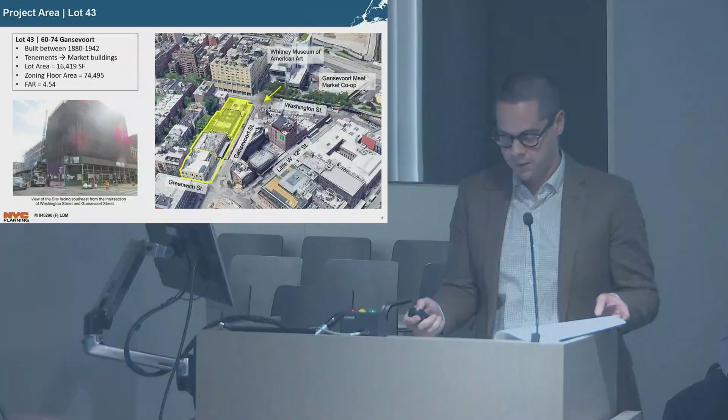Good afternoon again. This is a private application for a modification to a restrictive declaration to allow for an expanded range of uses in the buildings located at 46 through 74 Gansevoort Street in the Meatpacking District, Manhattan Community District 2. The project area is bounded by Washington Street on the west, Gansevoort Street on the north, Greenwich Street on the east, and Horatio Street on the south, and is located on the block immediately southeast of the new Whitney Museum of American Art and the terminus of the High Line, which you can see in the upper left-hand corner of the map. The project area is composed of 3 individual zoning lots, which I will discuss in more detail.

Lot 43 has 2 buildings. The one-story market building at 70 through 74 Gansevoort Street, on the corner with Washington Street, was built in the early 1940s and was recently demolished to make way for a new 6-story building currently under construction - that's the building with the netting in the foreground of the photo in the lower left. The market building next door, at 60 through 68 Gansevoort, was built in the late 1880s as 5 tenements and then converted for wholesale food-related uses in the 1940s. It is undergoing major renovations to add 3 additional stories to the existing 2-story structure. Both buildings on Lot 43 will be combined into a single building with a total floor area of just under 75,000 square feet, and construction is proceeding pursuant to LPC approvals.

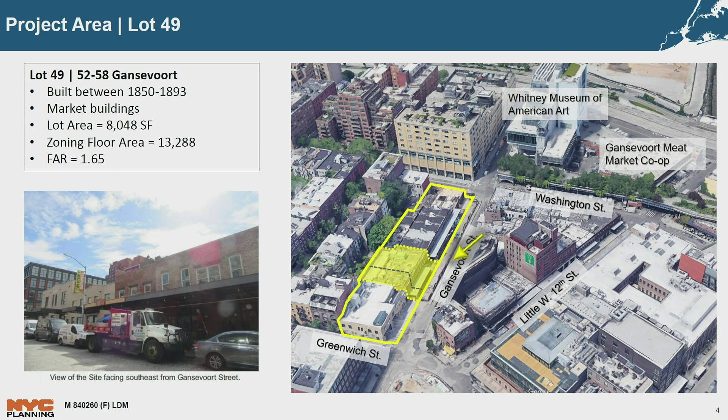52 through 58 Gansevoort is improved with 2 market buildings built between 1850 and 1893. Construction of a horizontal addition and major interior and exterior renovations were recently completed pursuant to LPC approvals. Lot 49 has a zoning floor area of just over 13,000 square feet, most of which is currently occupied by a restaurant. 46 through 50 Gansevoort is improved with a market building built in the late 1930s. Construction of a rooftop addition and other interior and exterior work was recently completed, again pursuant to LPC approvals. Lot 54 has a zoning floor area of just under 12,000 square feet and is fully leased to 2 retailers.

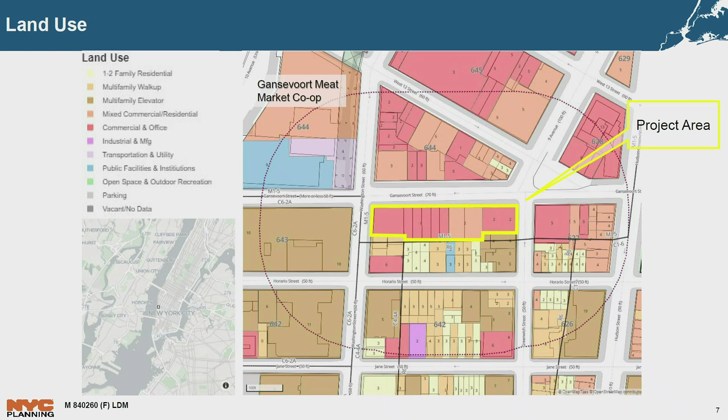The project area is located at the nexus of manufacturing, residential, and commercial zoning districts in an M1-5 district, which are medium-density areas that typically allow a wide range of light industrial and commercial uses as of right, such as repair shops, wholesale service and storage facilities, offices, restaurants, and retail.

The project site is adjacent to a C6-2A district outlined in red, which was rezoned in 1984 from M1-5 manufacturing zoning district. The 1984 zoning was intended to facilitate new residential development and conversion of non-residential buildings within the rezoned area. At the time, the environmental impact statement disclosed potential adverse impacts on land use, neighborhood character, and industrial meat production businesses. To mitigate those impacts, the commission required restrictive declarations on several properties, both inside and outside of the rezoning area. As part of that zoning map amendment, although the project site was not within the rezoned area, a restrictive declaration was recorded against the project site to limit the permitted uses.

And as Sylvia mentioned, the practice of requiring DDECs with zoning map amendments is no longer common practice.

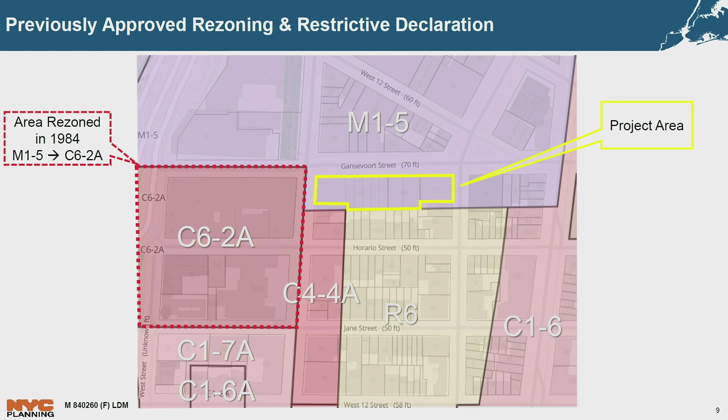The restrictive declaration required that the project area be used only for permitted uses, which included specific commercial and light manufacturing uses in use groups 11, 16, 17, and 18. It also required the owner to use best efforts to maintain the industrial space for meat-related use group 17A and 17B uses, and in the event the spaces were to become vacant, to use best efforts to rent to such uses.

As the land uses and character of the surrounding neighborhood evolved and diversified away from its industrial roots, the restrictive declaration was subsequently modified twice since 1984. In 1998, the commission approved a very limited expansion of the permitted uses on lot 54 at the corner of Gansevoort and Greenwich to include use group 6, which contains retail, restaurant, and local services uses. After the study of potential impacts, the commission determined that the proposed action was appropriate and reflected the changing mix of uses in the area.

In 2003, the commission approved a further modification permitting use groups 6 and 9 on the entire project area to allow for an expanded range of business and commercial services. The commission's approval was subsequently modified by City Council to further exclude use group 6B office uses, eating and drinking establishments with entertainment uses, and eating and drinking establishments of any type in rear yards or on the roof from all the lots in the project area.

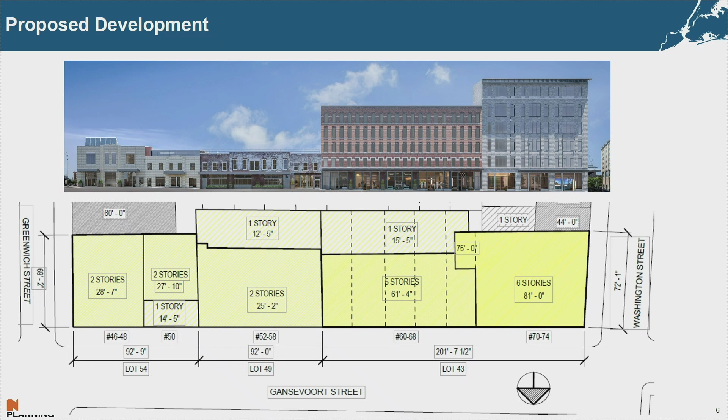Thank you. Other questions? Okay, we'll refer this to the community board for 45 days.

Item 10 on the agenda, page 482, is a non-ULURP post-referral of a City Planning Commission certification in Manhattan Community District 6. Our presenter is Bob Tuttle.

Good afternoon, Commissioners. This is a private application by the owners of 609 to 615 2nd Avenue for a joint MTA and CPC certification of a transit easement in the Kips Bay neighborhood of Manhattan Community District 6.

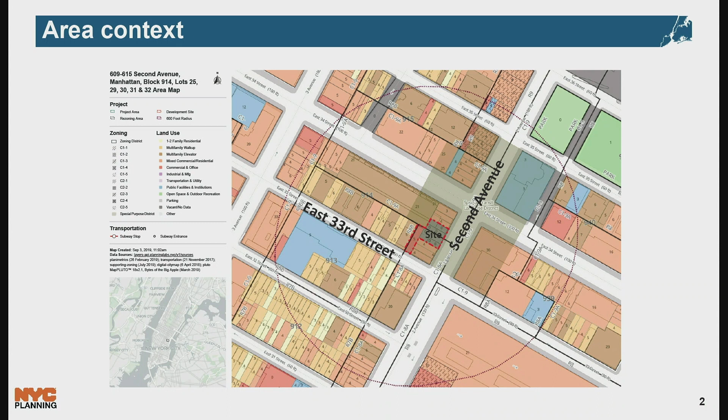Currently this site is mostly vacant, although a single-story building does currently occupy the portion of the site that fronts on East 33rd Street. The applicant plans to develop the site with a 7-story building with cellar space. The building would contain ground floor retail and 30 residential units.

The site is within the Special Transit Land Use District. That special district was established in 1973 in preparation for the 2nd Avenue subway line. Provisions of the special district enable the MTA and CPC to identify locations where transit easement volumes are required for subway-related uses and public access to the subway mezzanine or station.

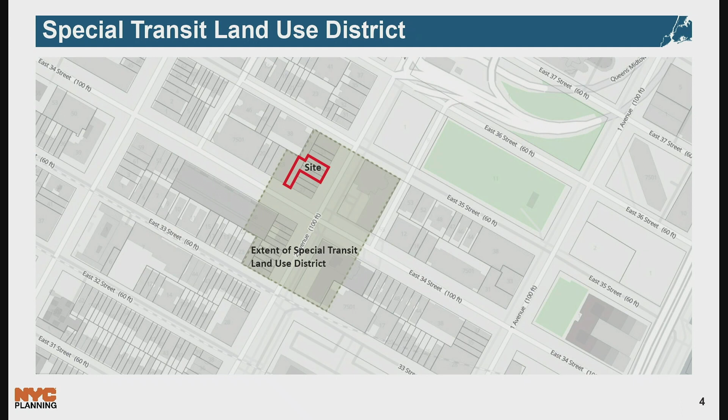In anticipation of that outcome, the MTA has identified the need for an easement on the site as critical as an alternative to the preliminary design, allowing flexibility if redesign of the underground station becomes necessary. Note that a transit easement volume does not count as floor area, and the volume can be used for any uses permitted by the underlying zoning until such time that MTA requires the easement for subway purposes.

This was referred to the Community Board and MTA. The Community Board submitted its resolution on October 18th, recommending that a transit easement volume be required in order to help achieve the goals of the Special Transit Land Use District, as stated in Article 9, Chapter 5 of the zoning resolution. MTA submitted a letter on October 22nd indicating that an easement is requested for this site.

Now, the action before the CPC is a joint certification of a transit easement pursuant to Section 95-04 of the zoning resolution. The MTA has requested the easement be provided. Since this is a joint certification, the CPC would need to vote in the affirmative to make the easement a requirement on this site. If the CPC votes to require an easement, the applicant can begin work with MTA to determine the extent of the transit easement volume. Approval of that volume would also require joint certification by MTA and the City Planning Commission. I'm happy to answer any questions.

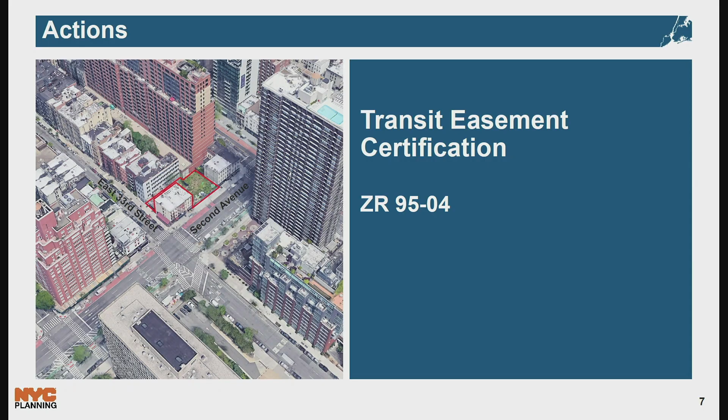Questions from the commission? Commissioner Levin.

Bob, in your very eloquent, elegant explanation, you left out the letter that was in our package from the MTA dated September 30th, in which New York City Transit said they do not need an easement at this site. Then we get the community board letter, and then the MTA sent us the letter you referred to, saying they've taken another look, and now they've decided that an easement is required. Can you give us some background on how that happened and what the additional considerations were, and why should there be an easement here?

What are these letters from the MTA? They don't provide a whole lot of clarity in understanding what it is we're supposed to do.

Right. So the MTA, since it's a dual or joint certification process with a community board referral, the community boards are given 30 days for their resolution. MTA is given 45 days to make sure there's enough time to schedule this meeting so that within 60 days everything is completed. Because if the commission doesn't respond within 60 days, the application just moves on regardless, without ever needing an easement.

So early on, MTA, looking at their 2004 FEIS, saw that no portion of that contemplated that this site was going to need an easement. And so that was really more New York City Transit looking at the FEIS and writing a letter to the commission: oh, it's not on the map, we don't need to pay attention to it.

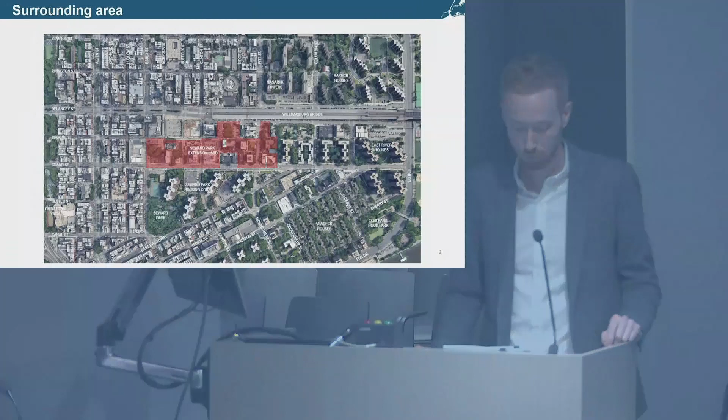Hello again, here we go. So this is an HPD application that's coming back from Community Board referral. The proposal is a modification to the Seward Park Extension large-scale residential development to remove a block which is currently located in two large-scale developments. As a reminder, the project is in the Lower East Side neighborhood in Manhattan Community District 3, generally bound by Delancey Street to the north, Bialystoker Place to the east, Grand Street to the south, and Essex Street to the west.

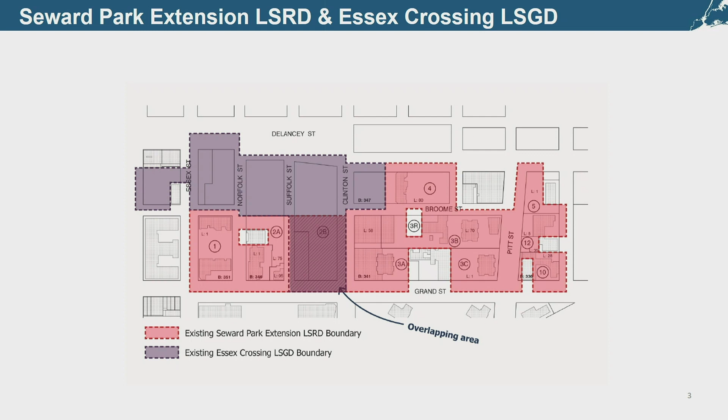Community Board 3 recommended approval of the application. And with that, I'm happy to take any questions. The commission may recall that this was presented in conjunction with the GO Broome, the purpose of which was to correct an inadvertent overlap of the two.

Commissioner de la Uz: So just besides changing colors on the map, nothing material is changing? Well, the colors are nice, but it would just be a dotted line. Yes, correct. Okay, other questions? It's really planning arcana, this is deep wonk, yes.

And I will then ask for an assent by show of hands to send a letter to DOB telling them that the proposed mods are minor. Thank you. And I believe that wraps it up. Yes, thank you, that concludes this review session. The time is 3:36.